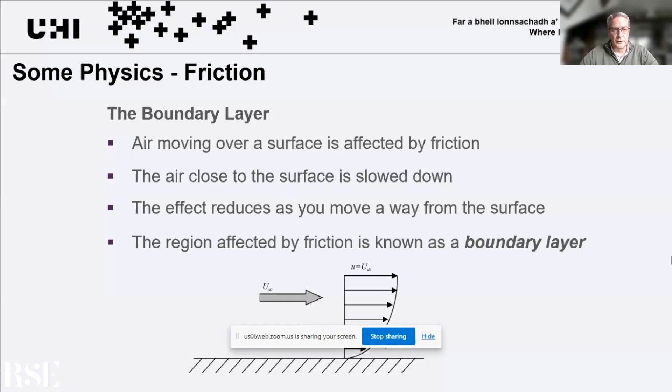That boundary layer, the region affected by friction, starts off usually very smoothly. It's what we call a laminar boundary layer. Then things like surface roughness or turbulence can cause that boundary layer to become turbulent.

The bottom left-hand picture shows air moving from left to right. The nice smooth smoke on the left-hand side shows a smooth laminar boundary layer, and then that breaks down into chaos, into turbulence, and you get the picture on the right showing that development. So the nice smooth air that starts off for a wing - the right-hand picture shows an airfoil with a boundary layer on it. The laminar boundary layer is very, very thin. It then transitions into turbulence, and you can see that turbulent boundary layer is much thicker than the laminar one.

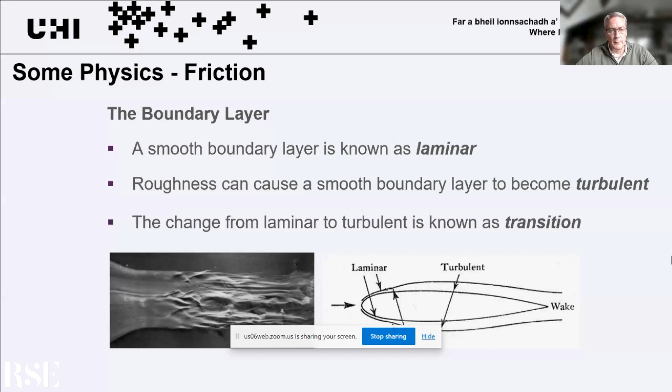So it generates a different distribution of energy. In the laminar boundary layer, because the particles are moving in the same direction, there is no energy transfer between the boundary layer and the outside air. When we move to a turbulent boundary layer, because there's air moving up and down, it pulls in energy from the outside edge of that boundary layer and helps it negotiate regions where that energy is required - going around corners, for example.

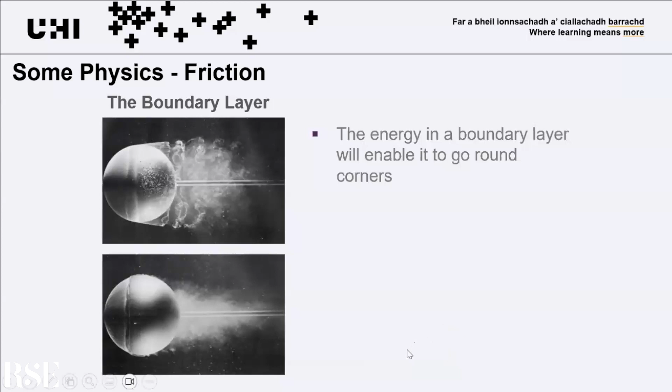Magic, thanks Michael. So the two pictures here show two different types of boundary layer. I mentioned a laminar and a turbulent boundary layer, and the significance of that structure to enable air to go around a corner. The top picture is a sphere in liquid in this case, with the liquid moving from left to right. You can see that the boundary layer detaches from the surface of the sphere at around the equator of the sphere, so the wake behind it is almost the same diameter as the sphere itself, and it's very unsteady, causing forces on that sphere that make it move in random directions.

So we have what we call a laminar separation. A laminar boundary layer separates from the surface of the sphere, and we have a laminar separation.

If we glue a wire to that sphere, which introduces turbulence, we now have a transition from a laminar boundary layer to a turbulent boundary layer, and the energy that the turbulent boundary layer can bring through from outside the boundary layer means it has the ability to go around the corner further. So I hope you can see that the wake, the lighter colored area on the bottom picture, is much smaller than on the top. In this case, a turbulent boundary layer means we have a smaller wake, and the smaller wake means we have less drag.

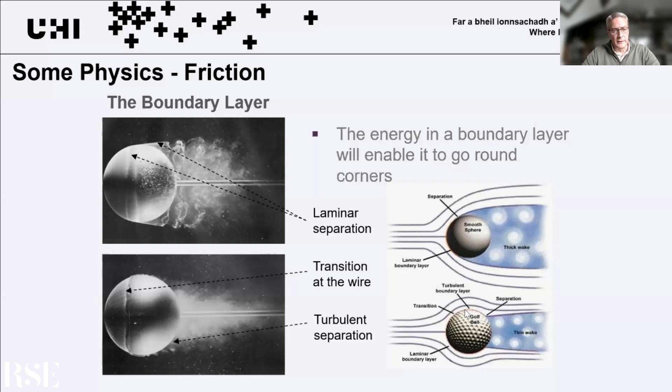Unless you play golf like I do, in which case there is a random element, which is the player rather than the golf ball.

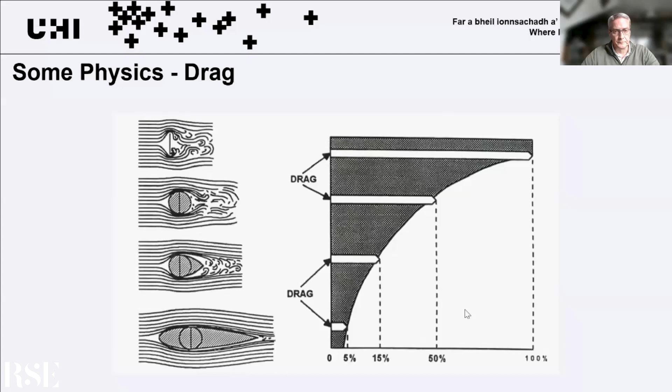So I want to show you a quick film from Holger Babinsky, who's at Cambridge University, who shows how air moves over an airfoil in a wind tunnel. In this experiment, the air again is moving from left to right, and we have smoke showing the streamlines of air moving over the airfoil.

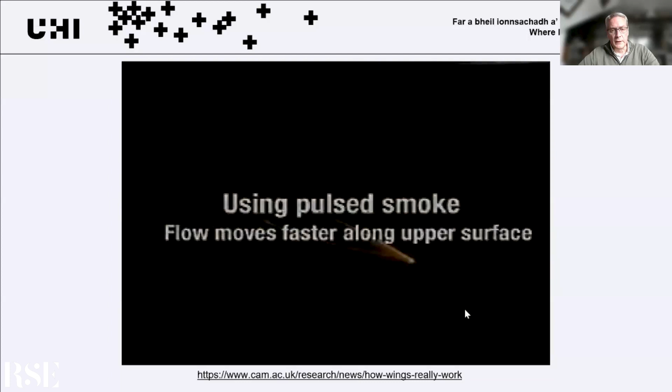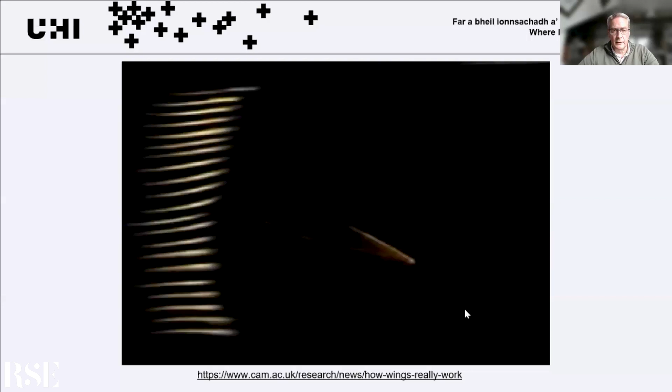So the airfoil is in the center of the picture. It's pitched at a certain angle of attack. We can see that the shape of the airfoil accelerates the air over the top. And from Bernoulli's equation, we know that higher speed air has a lower pressure than slower speed air. And so we have a pressure difference across the airfoil, and that's what gives us lift.

The faster air on top has a lower pressure. The slow air on the bottom has a higher pressure, and the airfoil literally sucks an aircraft off of the ground. Or if you're a racing car, it keeps you stuck to the ground.

But we can only extract so much force from an airfoil. So now we see the airfoil pitching upwards. The streamlines on top of the airfoil get closer together because the air is accelerating. But we reach a certain point where the air at the back of the airfoil starts to break down. You can see some unsteadiness at the trailing edge of the airfoil. And then we get total flow breakdown, which is what we call the stall.

So we can generate lift from an airfoil, but only up to a certain point. And when the stall happens, we lose all of the lift.

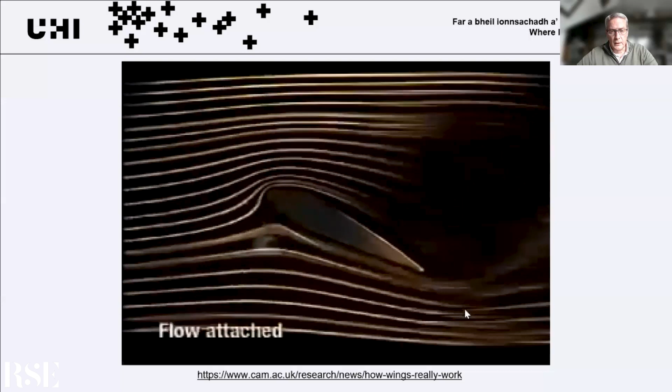So this again is a bit slower. The airfoil is pitching upwards, start to see some unsteadiness at the back. That then moves all the way forward and we get stall.

So in steady level flight, with an aircraft flying at a constant speed, at a constant altitude, the lift required is equal to the weight of the aircraft, and the thrust from the engines has to overcome the drag of the aircraft.

Now, the two graphs at the bottom there show how the lift on the left-hand side varies with angle of attack, and that is a graphical representation of what you just saw in the wind tunnel. As you pitch the aerofoil up, so the angle of attack is at the bottom, as we increase the angle, the lift goes up until a certain point when we get a stall.

On the right-hand side, you can see the drag. As the aerofoil pitches up, the drag goes up, and when we get a stalling angle, the drag goes up exponentially.

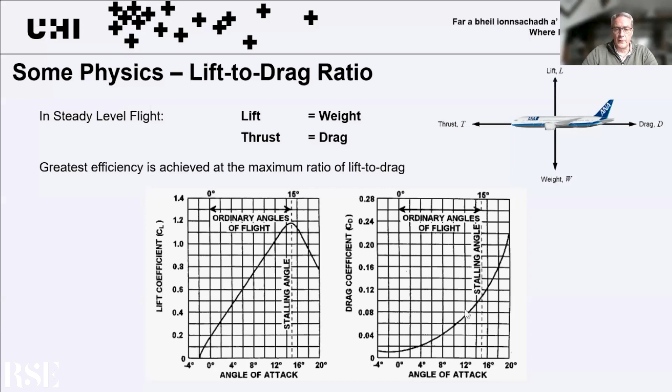So to design an aircraft, we need to get the maximum ratio of lift to drag. The best cruise performance comes from the ratio of lift to drag. So if we combine those lift and drag curves, we get the lift to drag versus angle of attack curve. I hope you can see that the peak of that curve is around 2 to 4 degrees.

So that's where we design aircraft to fly, because they are at their most efficient.

Unfortunately, though, if we add weight, we need more lift, and more lift causes more drag, which means we need more thrust, which means we need more fuel. And if we have to increase the size of the aircraft, that increases the surface area, which, because of friction, generates more drag, and that means we need more thrust.

And we run the risk of getting what's called a weight spiral. So if we add payload, for example more passengers, we need more lift, a bigger wing, we need more thrust, which means bigger engines. A bigger wing and a bigger engine means more weight, which means we now need to generate more lift, which means another bigger wing. So it's a compound problem, and we have to avoid this spiral of increasing weight to increase performance.

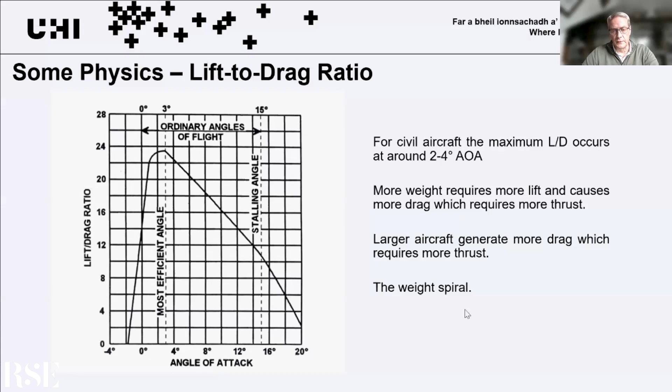So that was some of the physics behind aircraft design. Now coming into some of the practical aspects of that.

So there is some good news. Over the last 50 years or so, the efficiency of aircraft has improved significantly. So if we start in 1975 with the Airbus A300, the first of the Airbus aircraft, that had a lift-to-drag ratio of around 14.5. The current generation of aircraft, the A380 on the right-hand side there, had a lift-to-drag ratio of 20. That means that for every newton of drag, we had 20 newtons of lift. And things like the 787 and the Airbus A350 are now up at 21, 22 lift-to-drag ratio. So the efficiency has increased considerably since the first generation of modern jet aircraft.

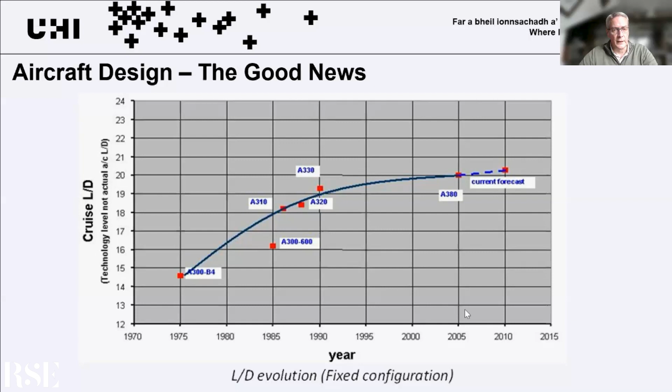And that's helped the fuel burn on aircraft come down. So the bottom axis here shows the evolution of aircraft through the decades, starting with the Comet 4 and the Boeing 707, which were the first jet passenger aircraft. And you can see if we take the Comet 4 as 100%, the A320neo, which was introduced into service just under a decade ago, burns 4/5 less fuel than the Comet 4. So we're down at 20% fuel burn compared with aircraft of the 1960s, and that's a massive decrease in fuel burn.

Traditionally, the main reason for doing that has been to increase profit for airlines, and now we have a different imperative. We know that burning kerosene is bad for the environment, so we have to come at this from a different angle.

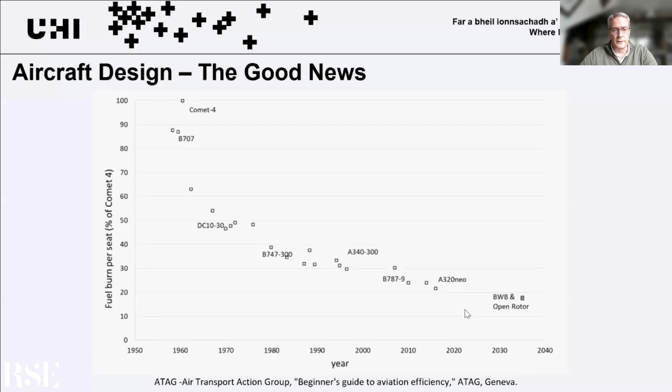And the bad news is that despite COVID, this graph shows how air travel decreased during COVID. So in 2020, during the lockdowns, air travel reduced significantly, and you've probably all seen pictures of aircraft parked up at airports and the reduction in aircraft usage. Although in our part of the world, in Scotland, things like the public service obligation route still operated in the islands because they are quite literally lifeline services.

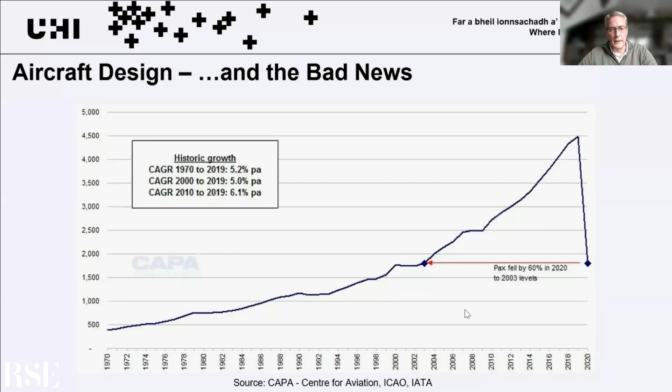People were interested to see how aviation would recover from that COVID dip. And if you ever go through an airport recently, you'll see that pretty much nothing has changed since pre-COVID. Air travel is predicted to grow still, and even at low forecast levels, the increase in passenger traffic by 2050 is more than double what it was pre-pandemic.

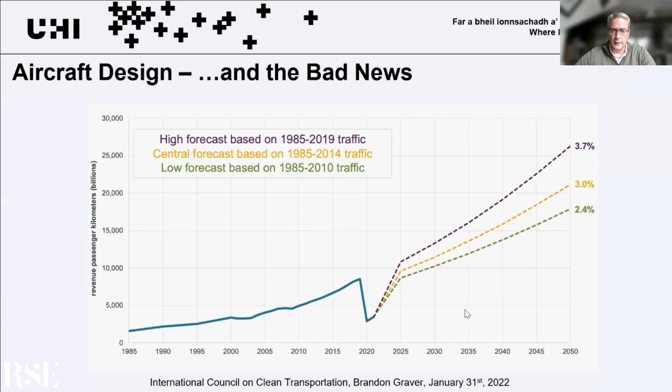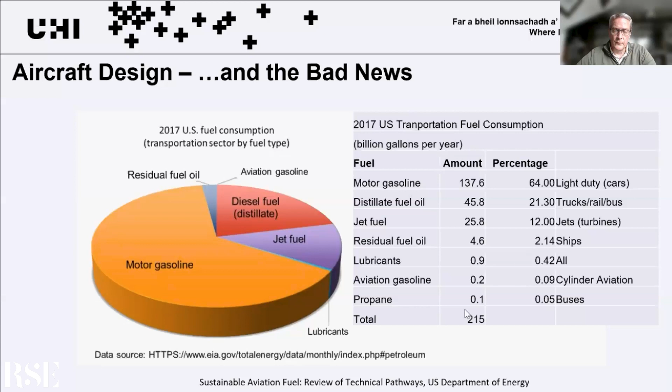And also there is aviation gasoline. So some of the aircraft that fly still run on effectively leaded petrol, including the Britten-Norman Islanders that fly around the islands in the north of Scotland. So it's not the biggest contributor, but it is a significant one, especially when you add things like the particulates emitted at high altitude and the formation of contrails and clouds.

So we have to do something, and that requires alternative propulsion. In Scotland, that's partly been driven by the Scottish Government's Green Deal. It was understood that aviation needs to change, and doing nothing is not an option.

So as part of the Scottish Government's Green Deal, there's an ambition to put the Highlands and Islands on a path to becoming the world's first net zero aviation region by 2040. And that requires Highlands and Islands Airports, who operate most of the airports in the north of Scotland and are the air traffic navigation service provider as well, to be part of that path to zero emissions, and more of that later.

So now some of the analysis of some of the alternatives that are being proposed. You've probably heard of hydrogen propulsion as being one of the significant alternatives to kerosene. So in the orangey column to the right-hand side here, we have kerosene, which is the fuel, jet fuel, which is used by most airliners. And it has a gravimetric efficiency, which means the available energy per unit mass, of 98.

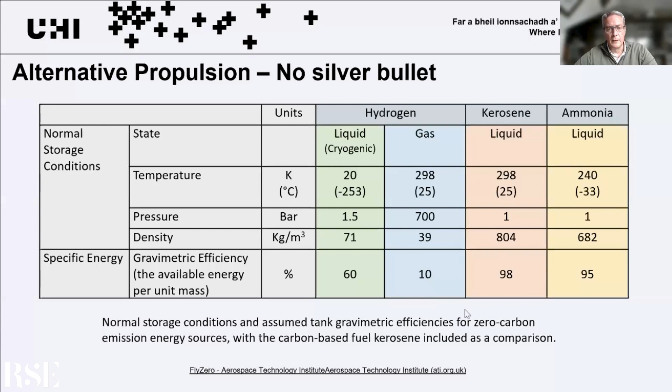On the left-hand side of that, we have hydrogen, both liquid and gaseous hydrogen. And you can see that the gravimetric efficiency is much less than kerosene. So already, even just looking at this very simple metric, there are challenges around getting enough energy out of the same mass of fuel compared with kerosene. Ammonia is an attractive alternative if we use this metric, but ammonia is a very tricky substance to handle.

And then there is cost. So the Aerospace Technology Institute in the UK did a program called FlyZero, and it ended 18 months or so ago, looking at alternative propulsion and including hydrogen. So we currently don't really know how much green hydrogen is going to cost. We know it's probably going to be more than kerosene costs today. So there has to be an incentive for people to use hydrogen, and that might be a kerosene with a tax on it, or replacing kerosene with sustainable aviation fuel, SAF.

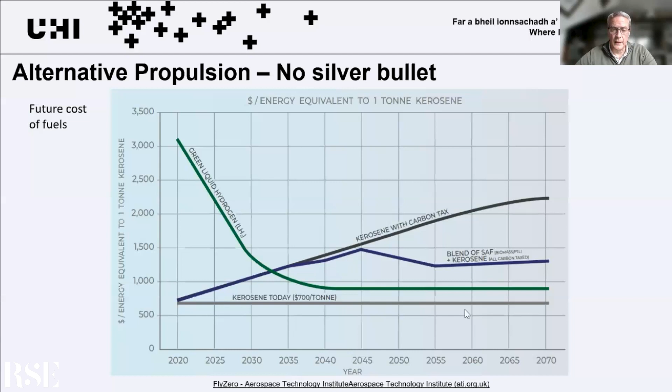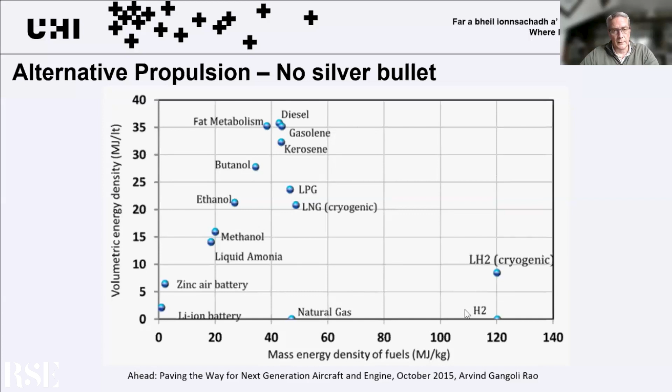And this is another graph reinforcing the challenges with different propulsions. So at the top middle almost, there is kerosene. So it has a very good volumetric energy density. So the amount of energy you get from a volume of the fuel is high, and so is the energy from a mass. Liquid and gaseous hydrogen win on the mass because they are lighter, but the volume required to get that same energy is massive. And then batteries are at the bottom left-hand corner. You get a small amount of energy from a very heavy mass, and I'll come to that in a minute.

So hydrogen can be used in a couple of ways. One is to be burnt directly within what looks effectively like a current jet engine. So we can use hydrogen, gaseous hydrogen and air to burn in a combustion chamber in a conventional jet engine. But we still get the conventional byproducts. We still get particulates that form the contrails, and we still get water.

We can, however, replace those with fuel cells. So we use hydrogen to run a hydrogen fuel cell, which effectively creates electricity to drive an electric motor to give us the same thrust. And that has advantages because it doesn't generate the particulates that gas turbines do, but the technology is in its infancy.

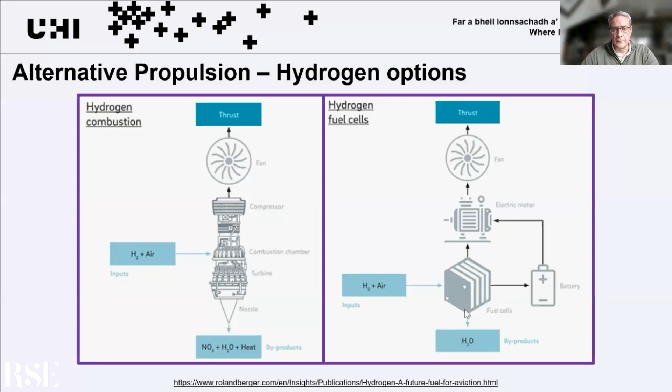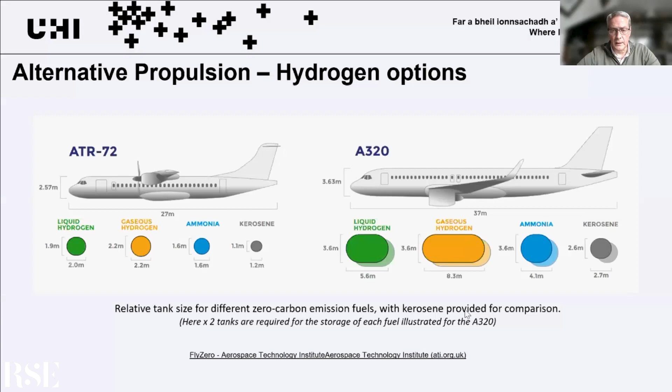Compare those with the same graphic going left from there in terms of ammonia, gaseous hydrogen, and liquid hydrogen. And you can see that the volume required to get the same energy, to give you the same range, is considerably more, especially with gaseous hydrogen. It's massive compared with kerosene.

And there are also problems with hydrogen itself. As many of you know, hydrogen is the simplest possible molecule. It's very tiny. It will leak through anything. It's very abundant, but not in gaseous form. So we have to generate that, and that requires energy, and that energy has to come from a sustainable way. Experience from the oil and gas industry shows that hydrogen can embrittle things like steel. So it's a tricky thing to try and contain and to manage. And there are historical precedents around why hydrogen can be tricky to handle.

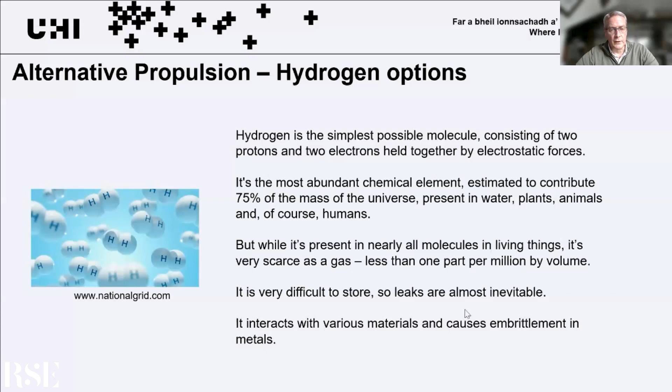So moving to electric, in the US, NASA has invoked the X-plane program on the X-57, the Maxwell program, to look at what's called distributed electric propulsion, looking at lots of small electric motors to replace two larger conventional engines. That program is now finished, I believe, without flights, but the lessons learned have been illuminating in terms of the capability of batteries and electric propulsion.

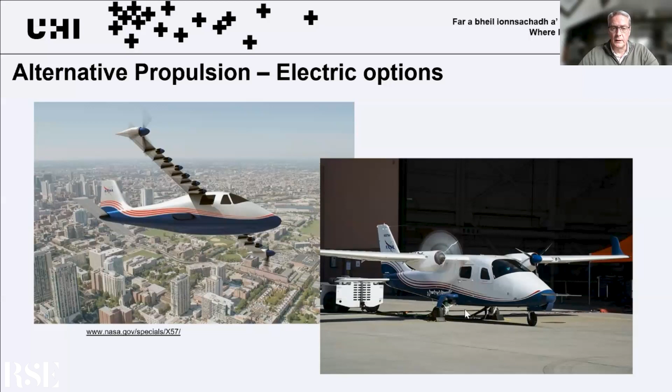So they too are not without their problems. If you ever looked in a big, either a hybrid electric car or other type of lithium-ion battery, it's a series of cells that are made up of interconnects, and managing the heat generated by those batteries, especially when charging and discharging, is a problem. And the materials we use to make those batteries too is troublesome. Things like the cobalt and lithium that are used are found in very few places.

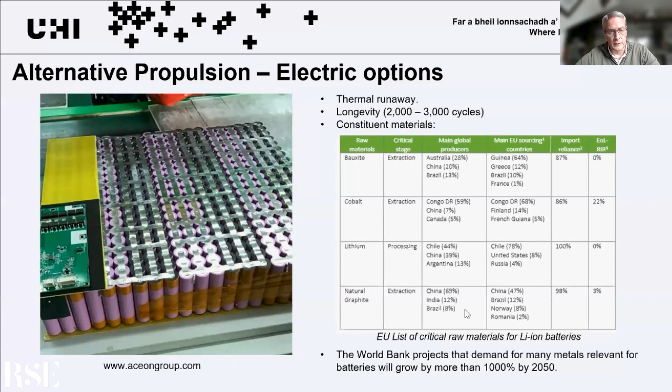So the resilience to global markets of these things is difficult, and the World Bank predicts that global demand for lithium-ion batteries will grow by a massive amount in the next few decades, and aviation has to compete with that.

Having said that, there have been some very good examples of how we can use batteries for aircraft, and Rolls-Royce created the airspeed record for a pure electric battery-driven aircraft using the ACCEL program, which flew 2 years ago now, and achieved a speed record of over 330 miles an hour, based purely on batteries and electric motors.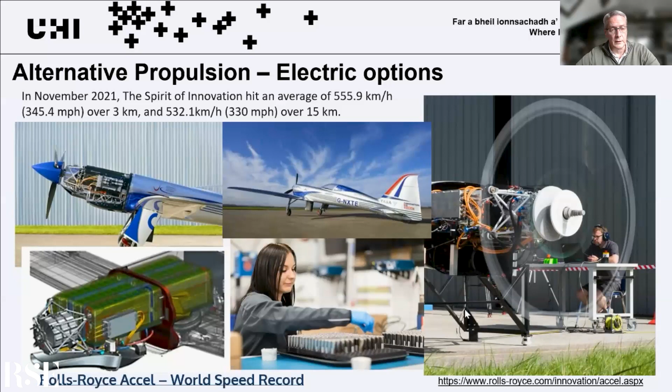So for pure battery, because they are so heavy, you can either reduce the payload, reduce the number of passengers, or you don't fly as far. So for a kerosene aircraft that can fly over 3,000 nautical miles, a battery aircraft would be able to fly less than 500. So there might be advantages with hydrogen, but then we get a problem with volume, which I'll come on to shortly.

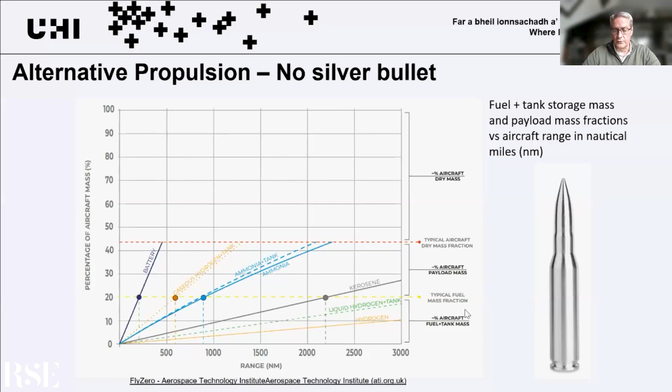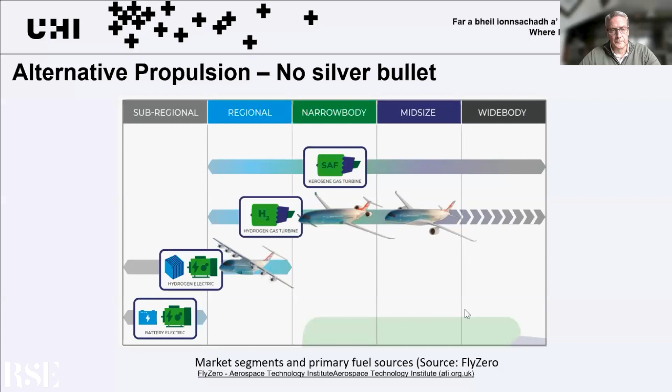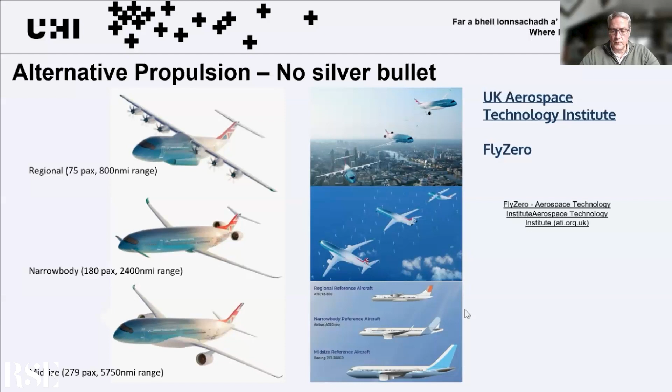So the ATI suggested 3 types of aircraft. So the regional at the top, it would be replacing the ATR aircraft that Loganair currently use on most of their northerly routes, down to a mid-size, which is transatlantic size aircraft. But one of the things you might be able to see here is the increase in the volume of the aircraft. And here's the reason why.

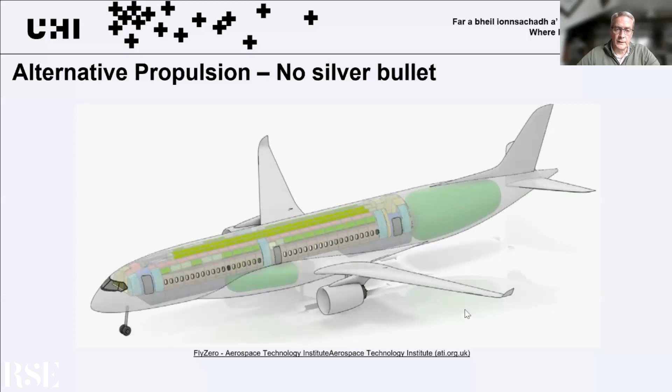So for the same number of people, the aircraft has increased in size. And going back to the physics that we talked about earlier, that's a bigger aircraft, more surface area, more friction, more drag, and you need more thrust. So we start getting into some challenging economics. But we've been trying to understand how those economics work.

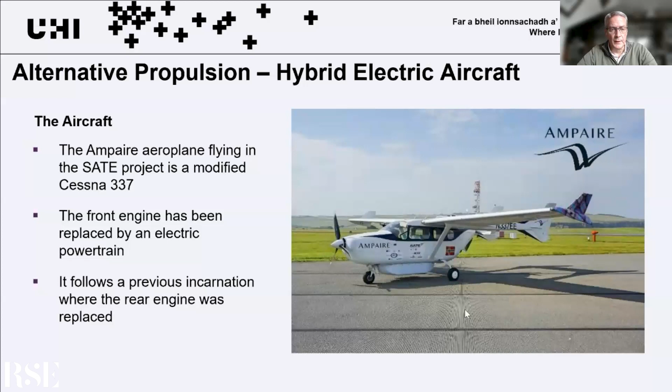And one of the projects that Michael mentioned I was involved in as chief engineer in the UK for Ampaire, which took a modified Cessna 337, which has an engine at the front and the back. So we have twin engine reliability, but with a single thrust line. And the front engine was replaced by an electric powertrain.

So in that front compartment, the standard internal combustion engine has been replaced by the electric motor, which is the black donut behind the spinner. And then we have an inverter. So the motor runs on AC current, the battery delivers DC current, and the battery pack is underneath the aircraft in the pannier, the white pannier that you can see underneath between the undercarriage there.

So not only have we replaced a lot of that internal combustion in terms of volume, but also reduced the weight considerably. So we need to consider weight and balance for the aircraft as well.

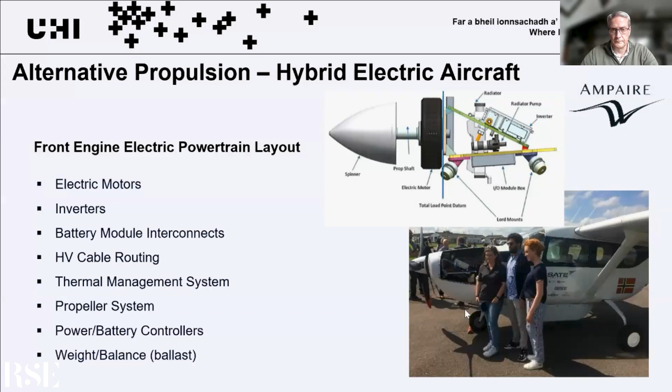That aircraft first flew in the US. It recorded 100% dispatch reliability. So the aircraft flew very, very reliably and recorded 24 flights over 28 days, the longest being 341 nautical miles. It was then taken to Hawaii to run on some indicative airline routes within the islands in the Hawaiian archipelago. So again, it did 22 flights over 17 days and it was 100% reliable.

It flew from Wick down to Exeter and did similar tests between Exeter, Newquay, and Land's End. So many of you may know that the Wick Airport is John O'Groats Airport, so it flew from John O'Groats to Land's End, and the aircraft is now in Alaska doing some flights up there.

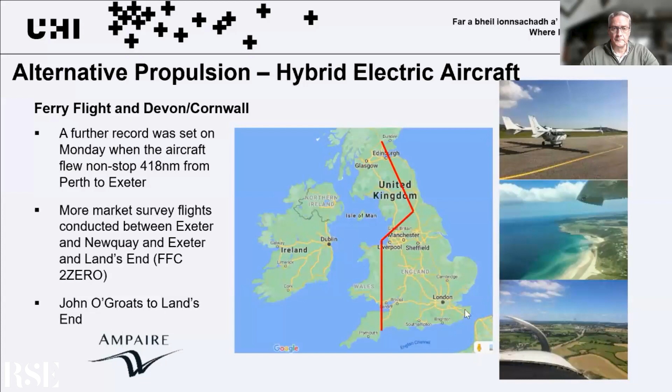So one of the things that has become a challenge for these aircraft is operational aspects of it. So we have things like charging. So if you own an electric car, you'll know that not every adapter or charging point can work on your car. They are specific to certain cars. And we need to understand how those aircraft can be designed so they are safe, because it's a whole new technology that we need to develop safety standards for. So there's a whole load of operational and infrastructure and energy questions that we need to answer.

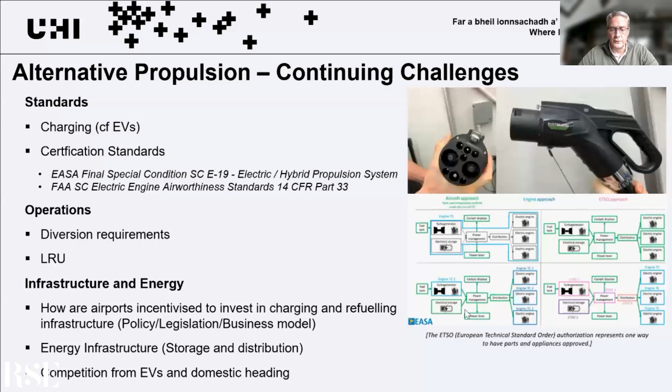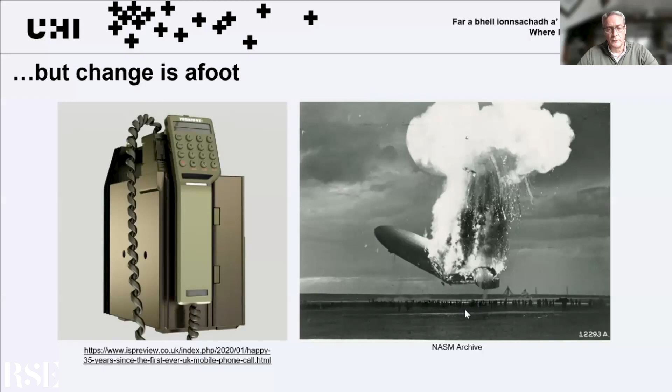But the good news is it changes fast. So the left-hand picture there is what a mobile phone looked like when I was a kid. The battery pack has reduced significantly, so we can carry them around in our pocket now. And hydrogen has had a bad press in aviation ever since the Hindenburg, although that was caused by the skin of the aircraft rather than the hydrogen itself. So we've moved on, but not without risk.

So finally, talking about the Sustainable Aviation Test Environment, it was set up under the UKRI's Future Flight Challenge Programme to investigate alternative propulsion and alternative operations of aircraft on realistic use cases in an operational environment. So Kirkwall is an operational airport. It has timetabled aircraft both to the mainland and between the islands. It has oil and gas helicopters, general aviation, and everything you'll see at a busy airport, but in a less dense air traffic environment. So looking at the energy infrastructure, the aircraft themselves, the digital infrastructure, so the communications between the aircraft and the ground, and involved the local authorities as well.

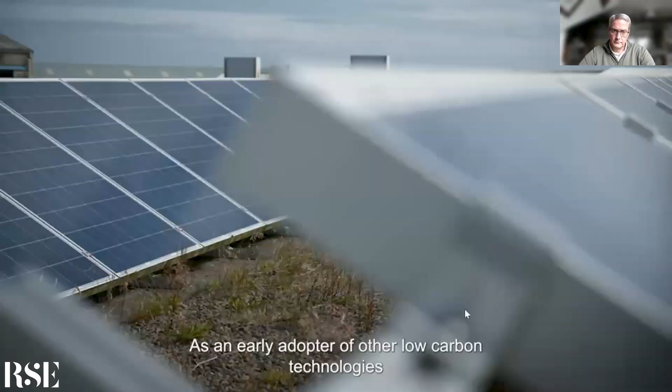Unmanned aerial vehicles, UAVs, are also being trialled, demonstrating real-life service demands to connect communities. As an early adopter of other low-carbon technologies, Orkney is an ideal living laboratory for testing aviation technology, offering a real-world environment with harsh weather and inter-island routes.

Orkney was the ideal place to set up this environment. There's a few reasons for that, not least of which is the buy-in from a local community. People in Orkney are really excited around renewables and sustainability. Hopefully, one of the benefits of this long-term will be that we manage to improve connectivity as well.

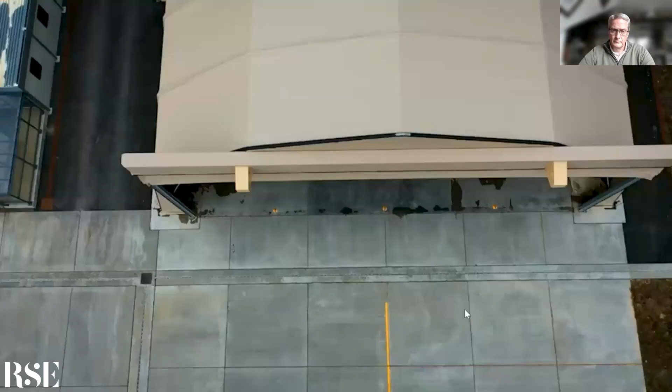Technologies range in scale, from the smallest drones to commercial passenger planes. Airport infrastructure supporting the development of sustainable aviation testing has also been put in place. A large, purpose-built hangar fitted with charging points gives ample space for multiple aircraft and technology teams. At over 30 metres long, it can easily accommodate wingspans of up to 20 metres.

Dedicated on-site offices are well equipped with super-fast broadband, offering a meeting and work space for technology developers. Windracers' ULTRA UAS is a twin-engine, uncrewed aircraft that is capable of carrying 100 kilograms payload at a distance of 1,000 kilometers. It's been specially designed for transporting aid and for logistical transport in rough conditions, on unprepared runways, any environment really.

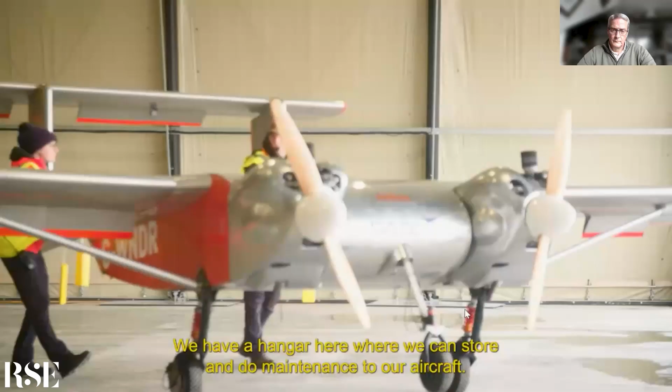It is very important for us to be able to have this test environment. We have a hangar here where we can store and do maintenance to our aircraft. We have some offices here where we can have our ground control station, where we can have all our communications equipment, so we can get our staff ready and basically test it once we have the opportunities and the weather windows to do it. For us, it is vital to have this kind of facilities where we can come test in a safe environment, in a controlled environment.

SATE provides the blueprint for net zero regional aviation, placing the UK at the forefront of the transition to low carbon flight. For HIAL, its Sustainable Aviation Test Environment is the first step to a wider goal of decarbonising aviation in the north of Scotland and the islands. SATE, providing a test centre to accelerate the industry towards net zero, where blue skies become a little bit greener.

So I've just given you an indication of some of the challenges that we face. They are significant, but we have to start somewhere. When I talk to school pupils, I say that I hope if they choose aviation as a career and get to the same point in their career that I'm at now, they will look back and laugh at what we're doing, because they'll have come up with a much better way of doing this stuff. But we have to start somewhere, and that's what we're doing.